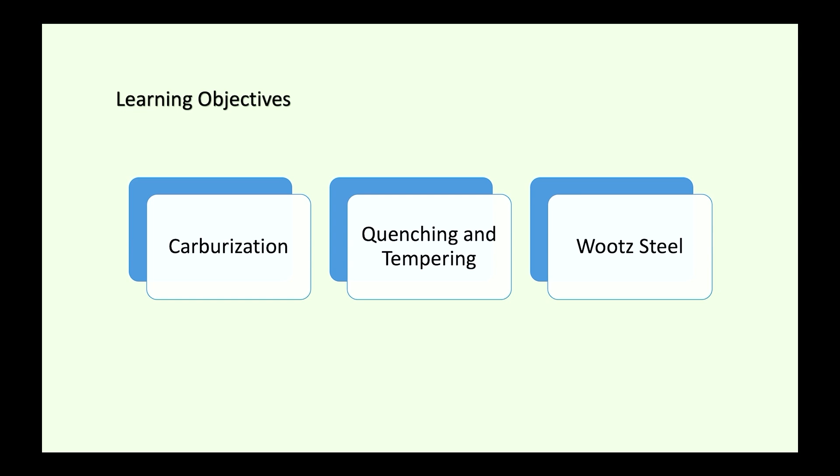The highlighted points we will discuss here are: iron in ancient India, the carburization process, smelting and furnaces recorded from iron age sites, the process of quenching and tempering, forging and tool making process, Wootz steel, and peerless examples of Indian iron metallurgy like the Iron Pillar at Mehrauli in New Delhi and the Dhar Pillar in Madhya Pradesh.

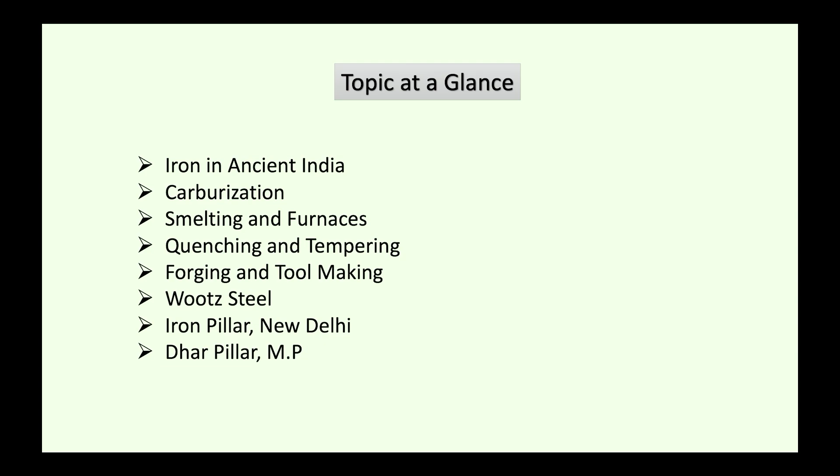The advent of iron technology revolutionized ancient Indian society, enhancing agriculture, warfare, and craftsmanship. Archaeological evidence traces its use back to the early first millennium BCE, with smelting and forging techniques evolving across regions like the Upper Gangetic Valley and southern India. Ancient texts such as the Rigveda and Yajurveda reference metal extraction, underscoring India's advanced metallurgical knowledge.

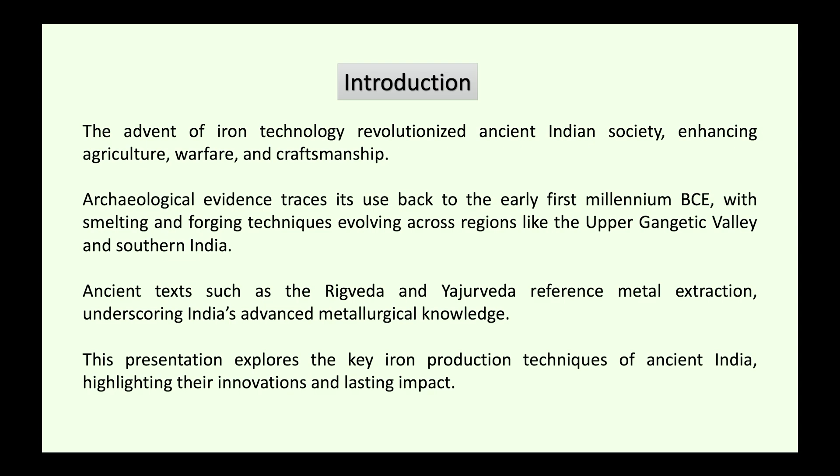This presentation explores the key iron production techniques of ancient India, highlighting their innovations and lasting impact. So the key points are: iron technology revolutionized ancient Indian society, enhancing multiple sectors like agriculture, warfare, and craftsmanship. Iron metallurgy boosted these fields.

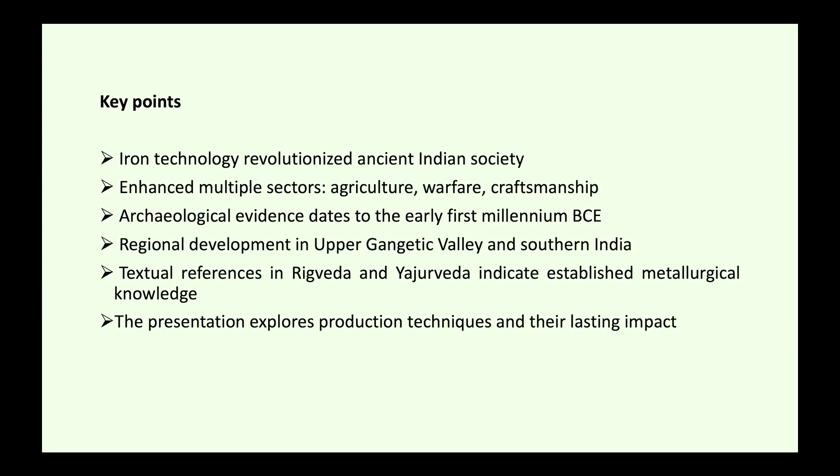Archaeological evidences date to the early first millennium BCE, with regional development in the Upper Ganga Valley and southern India. Textual references in the Rigveda and Yajurveda indicate established metallurgical knowledge. The presentation explores production techniques and their lasting impact.

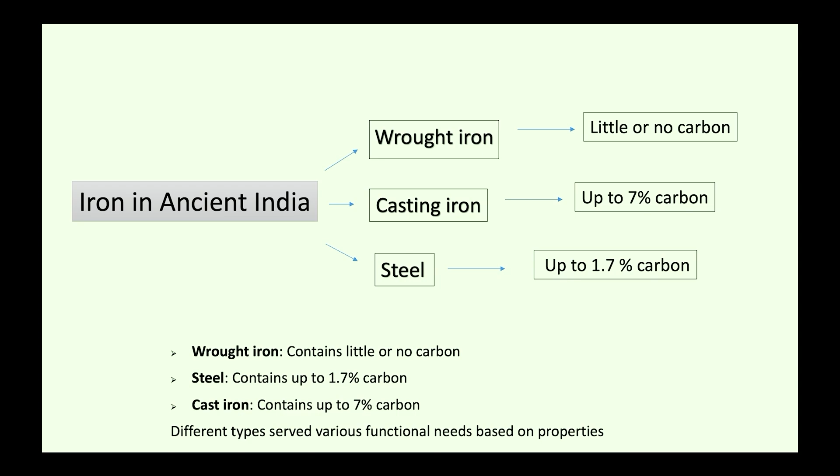Iron in ancient India is divided into three parts: wrought iron, with little or no carbon present; cast iron, with up to 7% carbon present; and steel, with up to 1.7% carbon present. Different types serve various functional needs based on their properties.

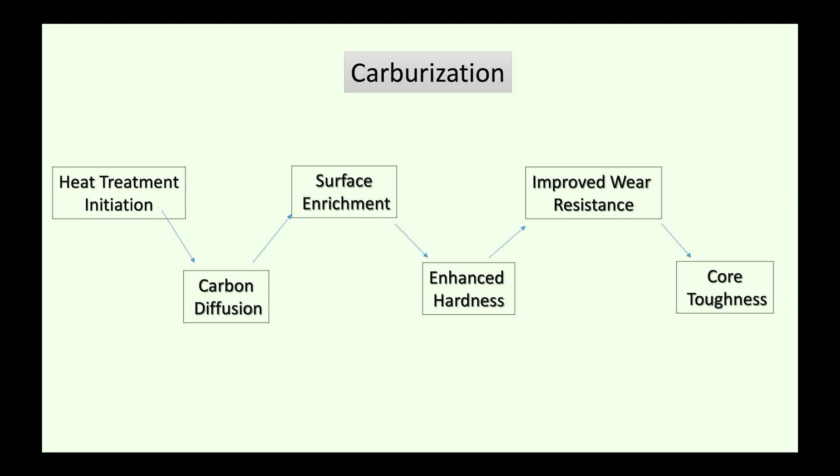The carburization process is important in iron technology. It involves heat treatment initiation, then carbon diffusion, then surface enrichment, enhanced hardness, improved wear resistance, and core toughness.

To understand this: in the carburization process, the heat treatment process is for iron enrichment. Carbon diffusion into the iron surface during heating results in surface hardening while maintaining core toughness, enhancing wear resistance and durability in the particular metal. This process was developed for specialized tool and weapon production.

Basically, the carburization process gives hardening - it makes iron much harder than before.

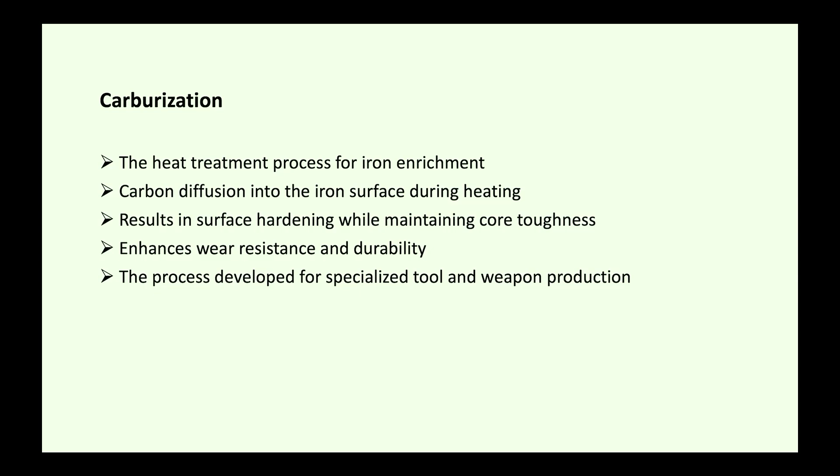In this technique, a chemical and spectroscopy analysis of 6 objects from the Rajghat excavation, dated 600 to 400 BCE, conducted by Bharadvaja revealed varying levels of carbon content ranging from 0.12 to 0.42%. The relatively low carbon percentage suggests these objects underwent natural carburization during the forging process. However, one object exhibited a significantly high carbon content of 1.1%, indicating it was intentionally carburized to enhance its properties. The carburization process is very important in terms of getting much harder iron.

In the Rajghat excavation, here is an example of different metal tools showing the carburization process. Objects from Rajghat excavation, dated 600 to 400 BCE, contain 0.12 to 0.42% carbon. One specimen with 1.1% carbon suggests intentional carburization.

Varahamihira in 550 CE documents carburization and hardening techniques for swords in Khargalaksnam, and in Komaranhalli, an iron spear with a 0.24% carbon layer is dated to 1200 to 1100 BCE.

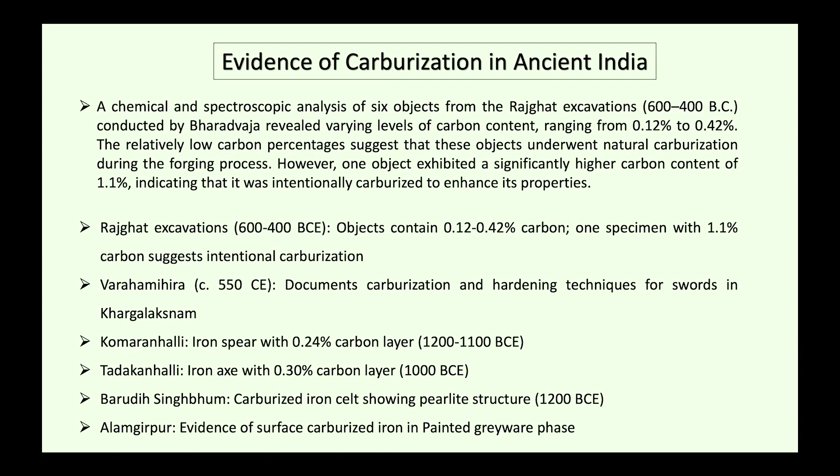So the process of carburization shows that the metal workers knew the activity by which the carburization process would be performed, because they knew this process would make the iron much harder.

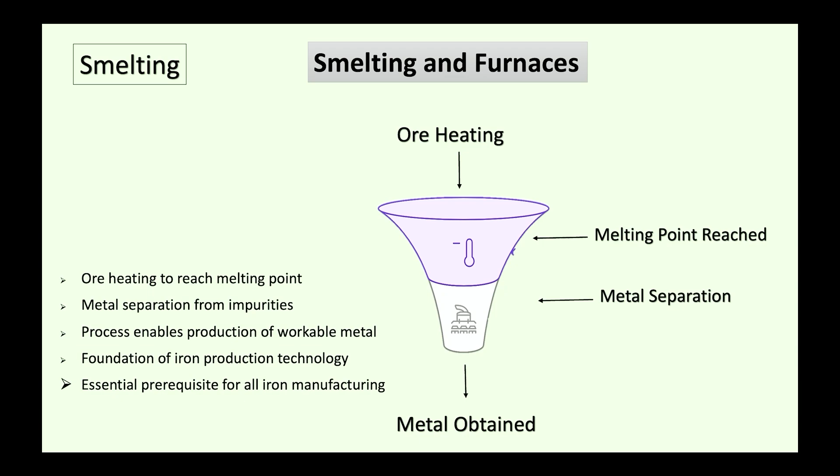Metal separation from impurities is very necessary. If we want to separate the impurities, then the metal should be separated from the ore by the process of heating. This process enables production of workable metal, the foundation of iron production technology, and an essential prerequisite of all iron manufacturing.

Now I have to draw your attention toward the furnaces, because iron needs much higher temperature to smelt or heat. So the structure of the furnace and the temperature maintenance by the ancient metal worker is also very important. A high temperature heating chamber or structure is necessary for melting or smelting metal, glass, ceramic, or anything.

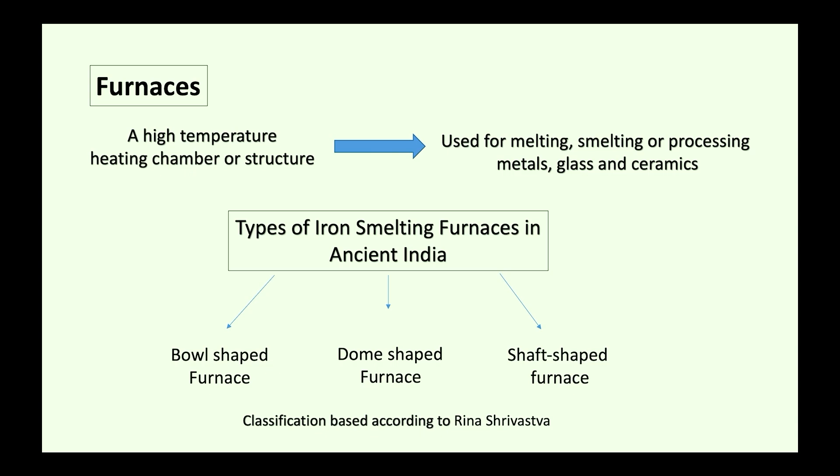Types of iron smelting furnaces in ancient India are bowl shaped furnace, dome shaped furnace, and shaft shaped furnace. These kinds of furnaces show their ability to select and understand what kind of furnace is suitable for different iron metal techniques.

Evidence of furnaces and smelting reported from different sites includes the Naikund furnace remains of the megalithic period in the Vidarbha region, and furnaces recovered from Kairadih, a site in Balia district, Uttar Pradesh, India, which are examples of shaft furnace. Naikund is a major iron smelting site.

At Noh and Jodhpura, furnaces with a side hole were recovered, in which the nozzle or bellows might have been inserted. Two furnaces have been discovered at Suneri in the Jhunjhunu district of Rajasthan. These are of an open type and were equipped with bellows. A similar type of furnace was recovered from Ujjain as well.

Evidence of smelting is recovered at Ujjain, where a huge deposit of iron slag and unsmelted molten iron ore, lumps or crystalline material identified as calcite or aragonite, and quantities of a whitish powder, probably lime, occurred in an exposed section, pointing to a simple method of smelting employed at Ujjain.

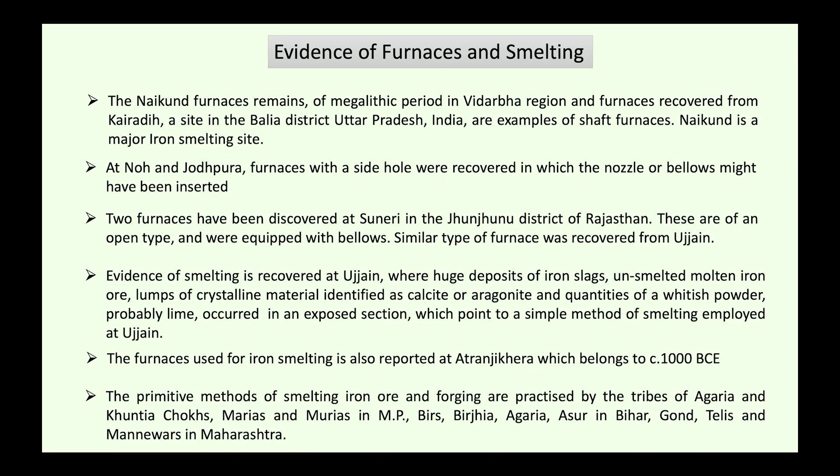On the basis of this information, we can say the ancient metal workers were well aware of furnace and smelting activity for iron metal, and they made their furnaces according to the demands of different iron metallurgical aspects. The different tribes still work in the same techniques because they are not associated with mainstream society and don't know about scientific discoveries regarding smelting, forging, or other technological aspects.

So they work as the ancient people worked, carrying that legacy into the present world. This makes them very important for understanding iron metallurgy from an ancient perspective for all of us.

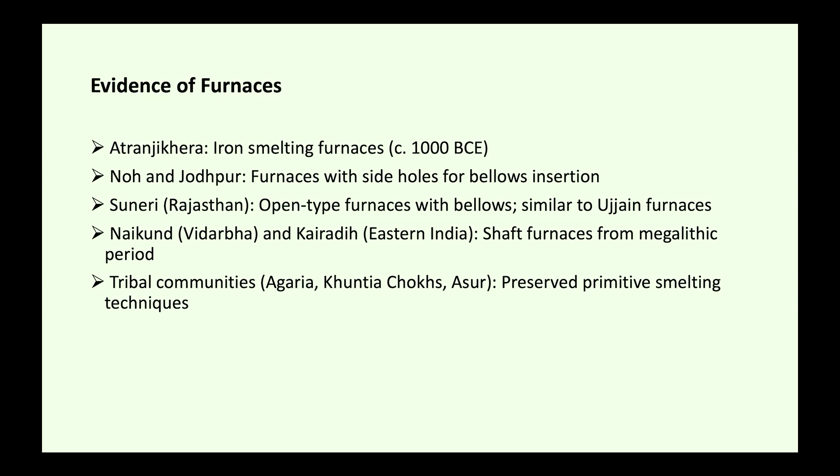More evidence of furnaces: from Atranjikhera, iron smelting furnaces dated 1000 BCE; Noh and Jodhpura, furnaces with side hole for bellows insertion; Suneri, Rajasthan, open type furnace with bellows similar to the Ujjain furnace; Naikund, Vidarbha, and Kairadih, Eastern India, shaft furnace for the megalithic period; and tribal communities like Agaria, Khuntia Chokhs, and Asur, who preserved primitive smelting techniques.

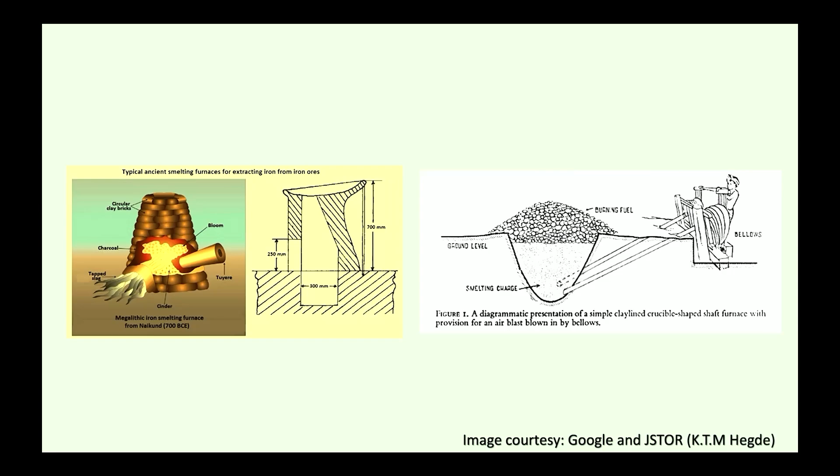This picture shows that. Now, quenching and tempering. These techniques are very important in iron metallurgy. Just look and understand this thing.

Iron metals found from many archaeological sites are also mentioned in Rig Vedic text or later Vedic text. But technological evidences also reported from different sites like metalworking workshop areas, slags, and tools, which prove that quenching and tempering activities were done on particular metals. This shows that metal technology was completely accepted, introduced and developed by society, and the metal workers of ancient India were well aware of these activities and performed them, and this knowledge was carried forward by later societies, continuing till this era.

In the quenching process, heated metal is rapidly cooled down. Quenching is also called sudden cooling, because once the metal is heated to a high temperature, it is then suddenly cooled in normal water. So it is called quenching, and it is also called sudden cooling.

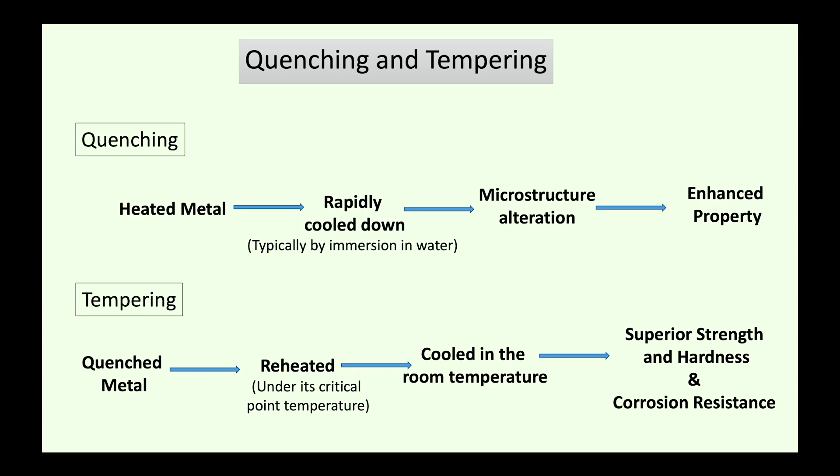When quenching was done on a particular metal, due to sudden cooling, a stretch mark appears on the surface of the metal tool. Then, using a hammer, the metal worker heats that particular tool and hammers on that stretch mark so that it disappears from the surface. This process is repeatedly performed by the metal worker, so it is called the tempering process.

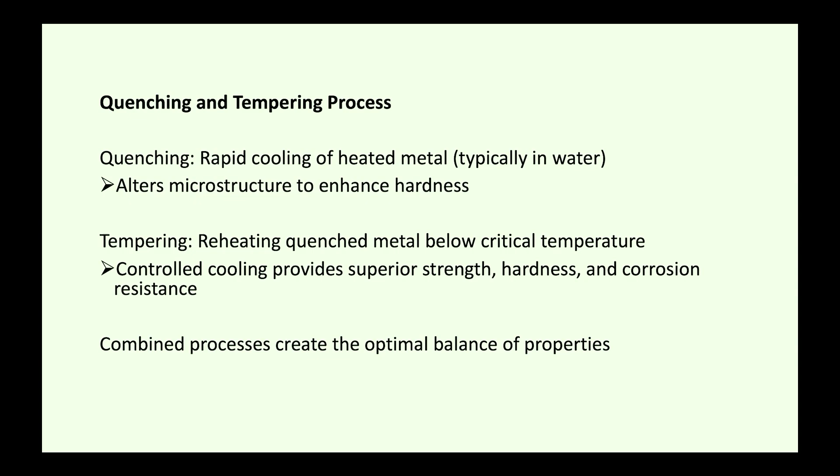To understand: quenching is rapid cooling of heated metal, typically in water, which alters the microstructure to enhance hardness. Tempering is reheating quenched metal below critical temperature. Controlled cooling provides superior strength, hardness and corrosion resistance. The combined process creates the optimal balance of properties.

Evidence of quenching and tempering: a sickle with a sharp cutting edge from Pandu Rajar Dhibi has a tempered martensitic structure and is considered to be the earliest quenching of an iron tool in India, dating back to the 3rd century BCE. From Jajamau, the chemical properties of the iron axe show quenching and tempering techniques.

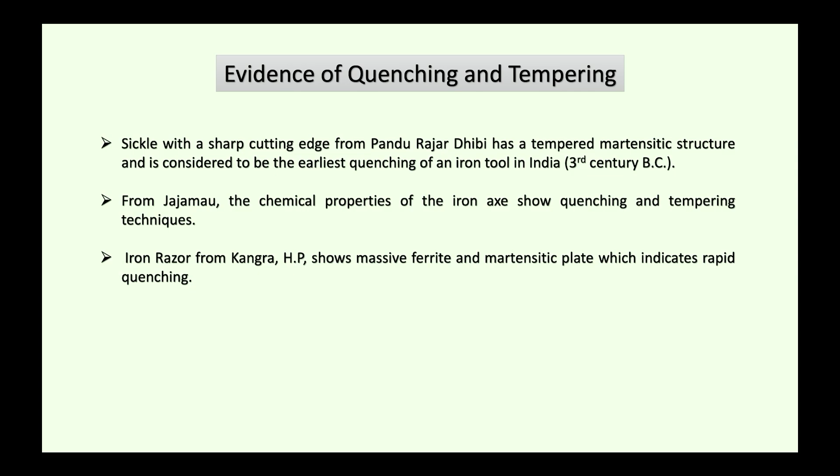Iron razor from Kangra, Himachal Pradesh shows a massive ferrite and martensitic plate which indicates rapid quenching. These examples are very important because they give information regarding the technological aspect of metal. It means the ancient metal workers transformed metal with true metallurgical understanding as well.

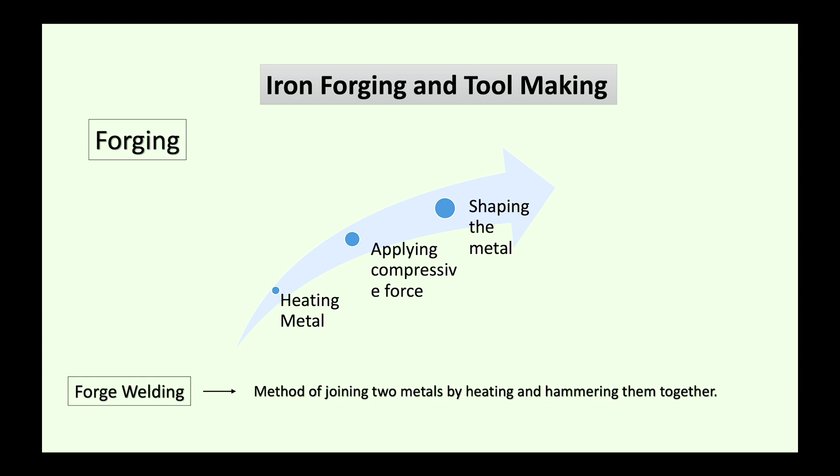This slide shows iron forging and tool making: the forging process involves heating the metal, then applying compressive force, then shaping the metal. It is a method of joining two metals by heating and hammering them together. This is iron forging and tool making.

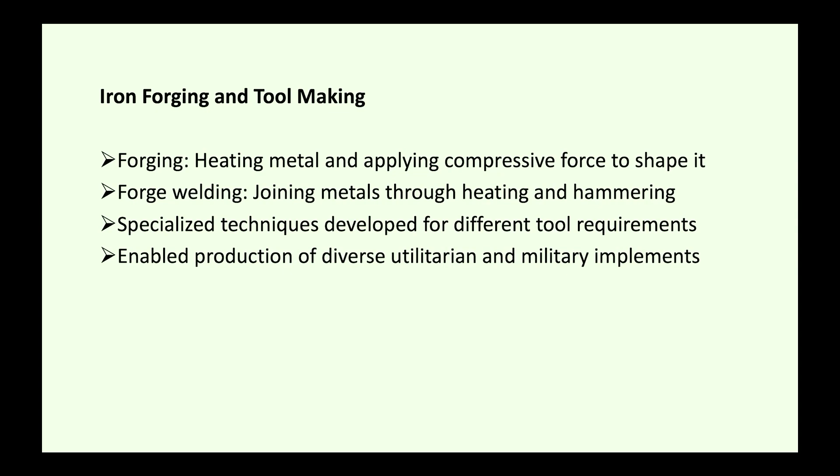Forging is heating metal and applying compressive force to shape it. Forge welding is joining metal through heating and hammering. These are specialized techniques developed for different tool requirements, enabling production of diverse utilitarian and military implements.

Evidence of forging and tool making: arrowhead and spearhead from Ujjain are among the earliest iron samples, dated 750 to 550 BC. The surface hardness of the hoe reported from Dhatwa shows a forge welded laminated structure, dated 550 BCE.

Hunting tools include arrowheads, spearheads, daggers, swords, socketed tangs, etc., armors, horse bits, and caltrops, belonging to the later stage from 1st century BC to 6th century AD. Agriculture tools include axes, sickles, spades, plowshares, hoes, chisels, etc. Household objects include knives, nails, clamps, etc.

The forge welding process was used to manufacture the Iron Pillar of Delhi, where lumps of wrought iron were heated and hammered together to form the structure.

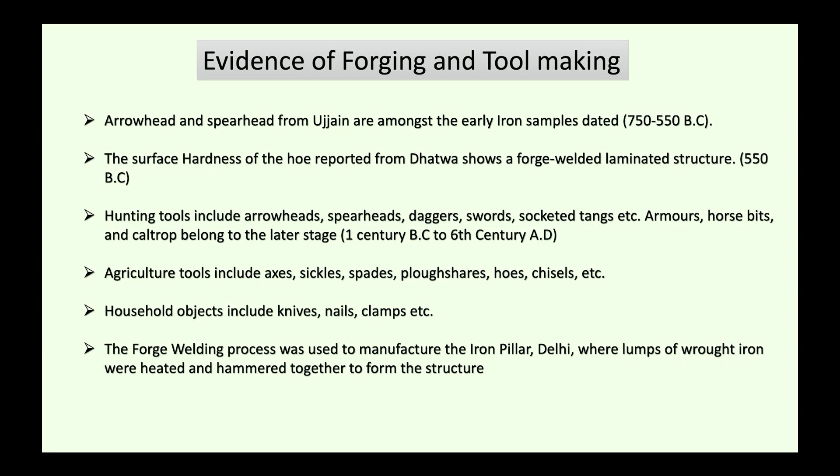Wootz steel, the advanced metallurgical example of Indian iron. Wootz steel, also known as Seric steel, was a high quality Indian steel used for sword making and exported worldwide. The term wootz likely originates from the Tamil word urukku or ukku. Around 300 BCE, wootz steel became very popular in the Middle East for its superior hardness and sharpness.

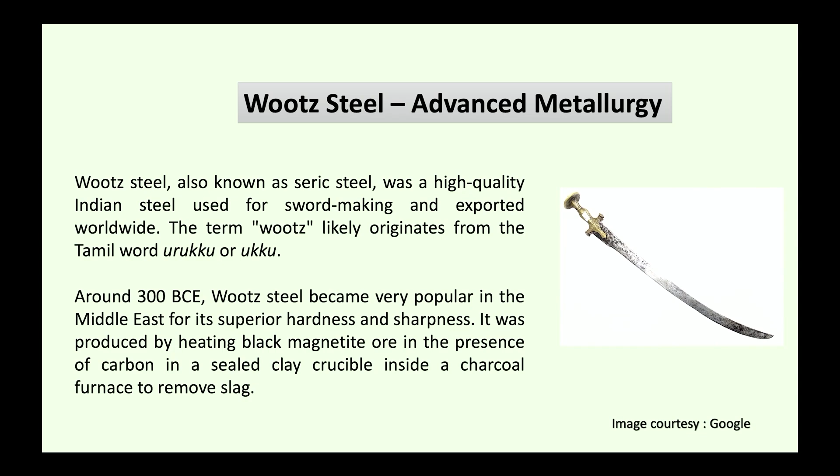It was produced by heating black magnetite ore in the presence of carbon in a sealed clay crucible inside a charcoal furnace to remove slag. So, the presence of carbon in iron, in any tool form such as a sword or weapon, gives sharpness and hardness to that iron metal tool.

Another method involves smelting the ore into wrought iron, followed by heating and hammering. Bamboo and arawai leaves were the essential source of carbon.

It is also very important that not only the metallurgical aspect, but the ancient metal working people were well known to vegetation as well. That's why they found out certain bamboo trees and arawai leaves to generate more carbon for their metallurgical needs. This information is really important to understand the advanced scientific and technological development during that time, not only in the metallurgical aspect but also in the biological and floral aspects.

By the 5th century, Chinese and Sri Lankan blacksmiths adopted this technique from Tamil artisans. The Golconda region in Telangana became a major center to export iron to West Asia.

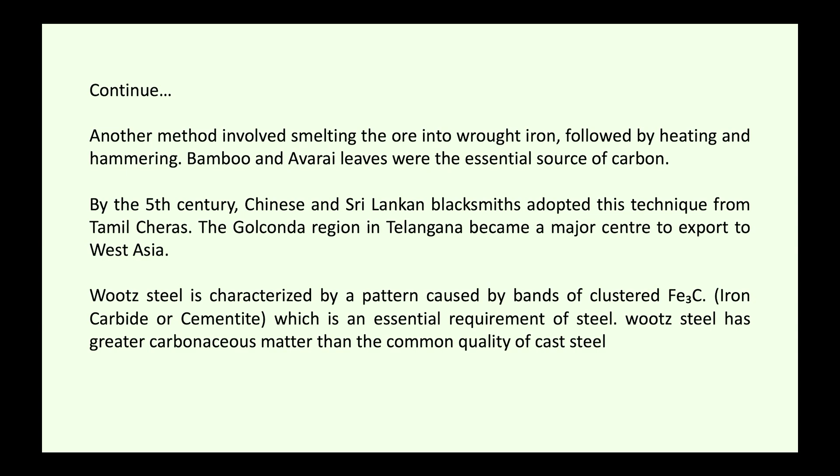Now, the information regarding the Iron Pillar at Mehrauli, New Delhi. This is an unparalleled example of iron technology in Indian science and technology in the world.

The Iron Pillar of Delhi, dating back approximately 1600 years, is a remarkable example of ancient Indian metallurgy. The pillar weighs between 7 to 8 tons and stands 7.21 meters tall, with 1.12 meters buried underground. It is composed of forge-welded wrought iron, which has contributed to its extraordinary resistance to corrosion.

The first detailed scientific analysis of the pillar was conducted by Sir Robert Hadfield in 1912. Metallurgical studies have revealed that the pillar consists of 98% wrought iron and contains 0.15% carbon,

0.05% silicon, 0.05% manganese, 0.25% phosphorus, 0.005% nickel, 0.03% copper, and 0.02% nitrogen. The iron used in the pillar exhibits high phosphorus content.

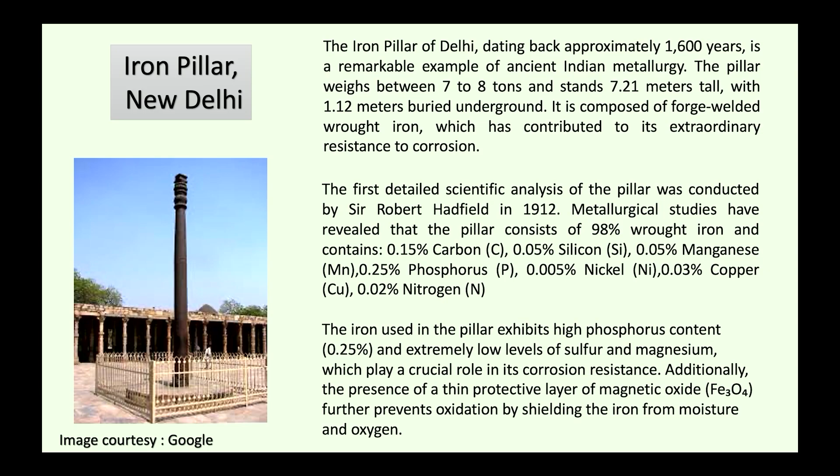0.25% phosphorus, and extremely low levels of sulfur and magnesium, which plays a crucial role in its corrosion resistance. Additionally, the presence of a thin protective layer of magnetic oxide further prevents oxidation by shielding the iron from moisture and oxygen.

The next important and unparalleled example is the Dhar pillar from Madhya Pradesh. The Dhar iron pillar, 14 meters in height and 7 tons in weight, is an important example of ancient Indian iron technology. Located in Dhar, Madhya Pradesh, it is believed to date back to the 11th century CE during the Paramara dynasty.

The Dhar pillar is made from a horizontal forge welding technique, wherein smaller iron sections are welded together. The pillar exhibits remarkable corrosion resistance properties. The microstructure of the iron in the Dhar pillar revealed the presence of entrapped fayalite slag inclusions.

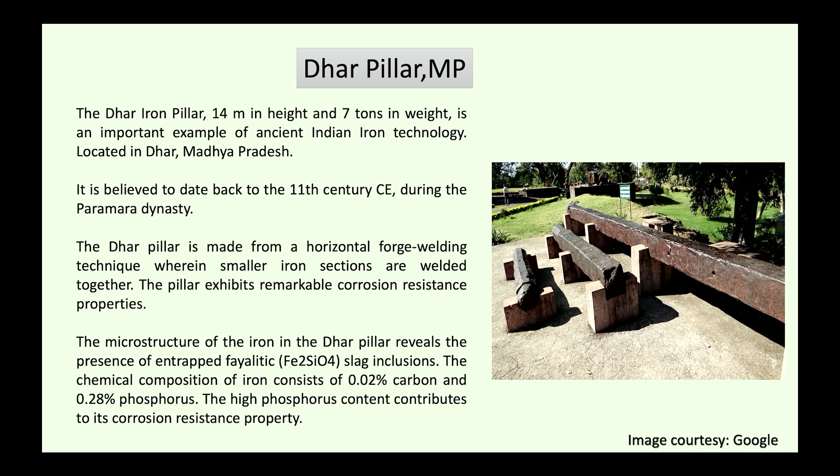The chemical composition of the iron consists of 0.02% carbon and 0.28% phosphorus. The high phosphorus content contributes to its corrosion resistant property.

So, on the basis of the technological terminology and the examples, we can say that ancient India demonstrated remarkable advancement in iron metallurgy, developing techniques that significantly influenced both domestic industries and global trade.

The mastery of ironworking included processes such as quenching and tempering, which enhanced the hardness and durability of weapons and tools. The production of wootz steel, a high carbon crucible steel known for its exceptional strength and flexibility, gained international recognition and was later used to forge the renowned Damascus blades.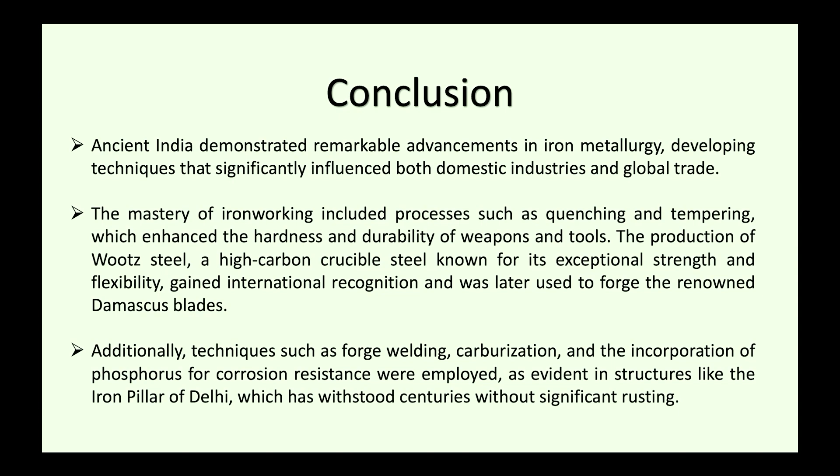Additionally, techniques such as forge welding, carburization, and the incorporation of phosphorus for corrosion resistance were employed, as evident in structures like the Iron Pillar of Delhi, which has withstood centuries without significant rusting.

In agriculture, the introduction of iron plows and tools significantly improved farming efficiency, supporting economic and population growth. Trade also flourished, with Indian iron and steel being highly sought after in regions such as Persia, the Middle East, and Europe.

Furthermore, ironworking skill contributed to architectural and engineering marvels, demonstrating a deep understanding of material science. Overall, ancient India's iron technology was a pioneering force in metallurgy, blending scientific precision with practical application. The advancement in heat treatment, forging, and corrosion resistance not only strengthened various sectors but also cemented India's legacy as a center of metallurgical excellence, influencing ironworking traditions across the world.

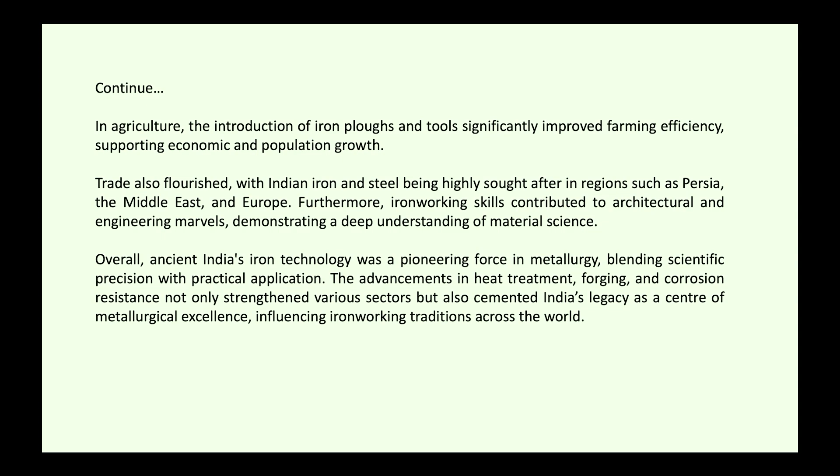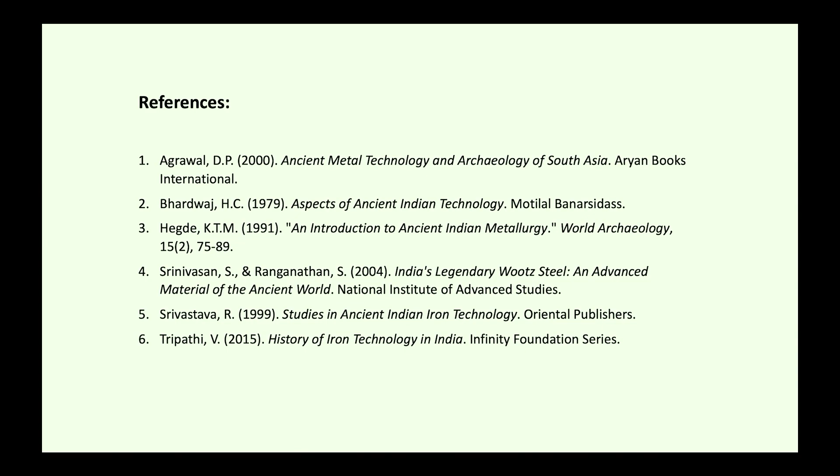So these are the basic references which can help you understand iron metal and metallurgy, their origin, their development, and their connection to other parts of the world as well as different regions in India. You can consult these for a better understanding.